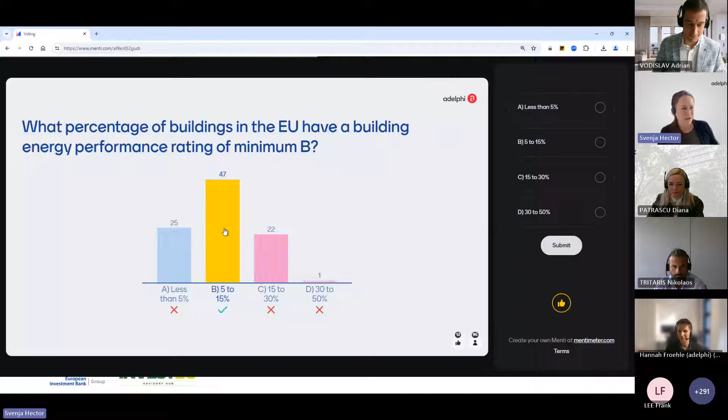Thanks for your answers. So indeed, the 47 colleagues here in the call that voted for option B are correct. If we look back at the slide set, we have this pie chart which shows that in the EU, about 10% of buildings have energy performance class B or better, with 75% being in the range of D or worse, and 16% in the C area.

The question is now, of course, what does that tell us? Is that good? Is that bad? Is that in line with where we want to get to, which is carbon neutrality including of the building stock by 2050? Indeed, this figure on the right-hand side says that we are lagging behind.

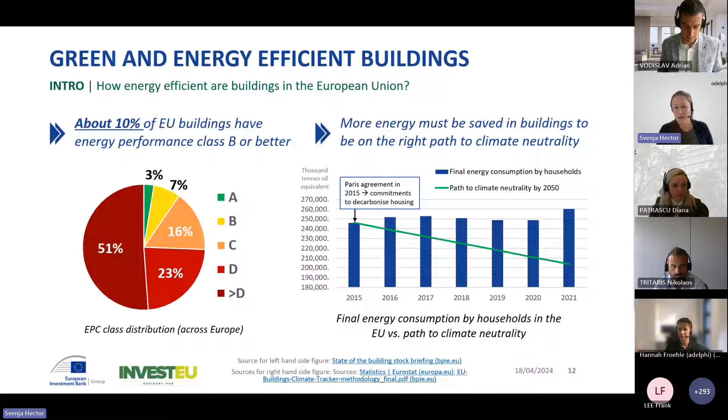What you see here is the final energy consumption by households in the European Union, shown by the pillars in blue, versus in green the path we should be following if drawing a straight line from the timing of the Paris Agreement in 2015 up until 2050. We should be following this path, but currently households are consuming too much. Hopefully the measures and regulations the European Commission has drawn out, in particular those shown here on the slide, will help us get more on track with emissions and energy consumption of buildings.

In particular, the ones highlighted here in yellow, but we'll say a few words on all of them listed here. Notably, several of those directives have been revised just recently. For example, the Renewable Energy Directive as well as the Energy Efficiency Directive have been revised in 2023, and prominently also the Energy Performance of Buildings Directive has been revised, with the revision adopted just a few weeks ago. Now let's look into what all of those directives mean for buildings and for the energy consumption of buildings.

The Renewable Energy Directive holds that by 2030, the renewable energy share of building energy consumption should be at 49%. The Energy Efficiency Directive, back in 2012, introduced national renovation targets. The Energy Performance of Buildings Directive, about which we will also hear more later on, is really the cornerstone of energy efficiency in buildings regulations within the European Union. It requires member states to define what major renovations are, what specific energy performance requirements are, what the renovation targets are, and to set up energy performance certification systems.

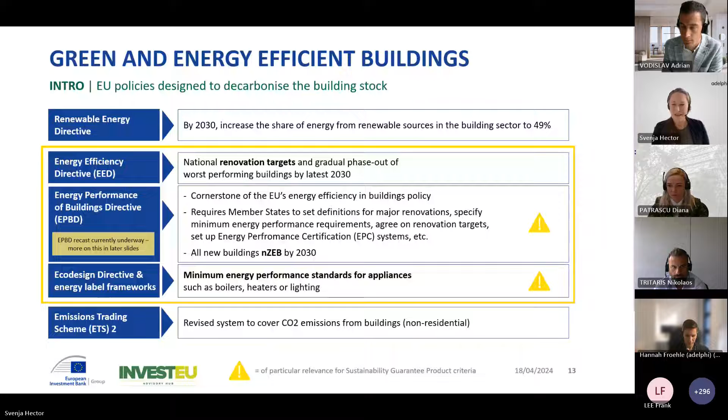Now, after this little introduction on the building sector, we would like to dive into the criteria for energy efficiency in buildings, both residential and commercial. For that, we would like to start again with a little quiz.

So please go back to your Menti, either on cell phone or in your browser. The link is still the same as previously. And there you will see the question popping up: which of the following measures are not eligible under the sustainability guarantee?

You can either apply your knowledge of the criteria here, or if you don't know the criteria in depth, just apply your best guess. You can vote among the following six measures: roof insulation and green roof.

Is it eligible or not? Mark it down if it is not eligible in your opinion. Construction of a near zero energy building, residential building of 6,000 square meters; purchase of an A+++ air conditioning; replacing old lighting with efficient LEDs; building performance consultation for the purpose of creating an energy performance certificate; complex renovation leading to 25% less primary energy demand.

So please take maybe 10-20 seconds to answer those questions, and we will then look at the results together.

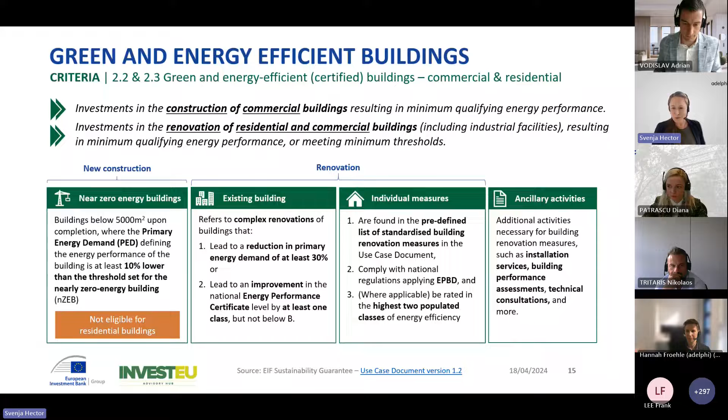With that, Hannah, I'll hand over to you to tell us a bit more about the first category, the new construction of near zero energy buildings.

Thank you, thank you Svenja. So as you just learned from the quiz and from what Svenja just said, under the sustainability guarantee, new construction is only eligible for commercial buildings.

For our purposes, these are any buildings that are not used for residencies. So that could be offices, warehouses, industrial buildings, agricultural buildings, etc.

The key criterion you need to understand for new construction is the nearly zero energy building standard, or NZEB standard. So what is an NZEB building? An NZEB building is highly efficient. It consumes very little energy, and the energy it does use comes mostly from renewable sources.

It achieves this efficiency through measures like highly effective insulation, high performing windows, energy efficient lighting, energy efficient heating, that kind of thing. So since 2021, all new buildings constructed within the EU already must be NZEBs according to the EPBD, the Energy Performance of Buildings Directive.

But the sustainability guarantee takes this further by requiring that newly constructed buildings have a primary energy demand that is 10% lower than the national NZEB standard for the country the building is in. Each member state has its own NZEB standard, usually based on a measure of kilowatt hours per square meter per year.

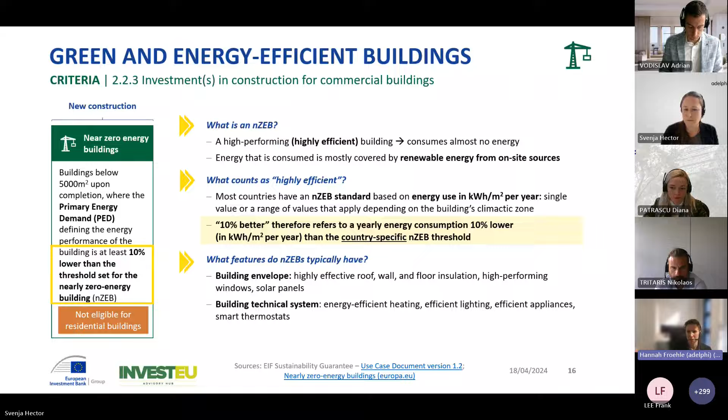Important to point out, these NZEB standards can vary widely across the EU, and we'll take a look at what that means on the next slide. As you can see from this diagram, there's a huge variation in the NZEB thresholds by member state, ranging from 30 kilowatt hours per square meter per year in Croatia to 290 in Malta.

As you can see from these orange boxes, some countries have a range of values that are applicable, and usually this is based on which region within the country the building is in.

As you probably noticed, there are several countries not pictured on this diagram, including Austria, the Flanders region in Belgium, Germany, Italy, Luxembourg, and Portugal. The reason you don't see them here is because they do not have a single or a set of kilowatt hour per square meter per year thresholds for their NZEB buildings.

Instead they have their own standard, and in several of these cases it's a composite metric that takes into account several different factors rather than just one. For example, it might require particular energy performances for different building elements rather than summarizing the building performance in this kilowatt hour metric like you see in the member states here.

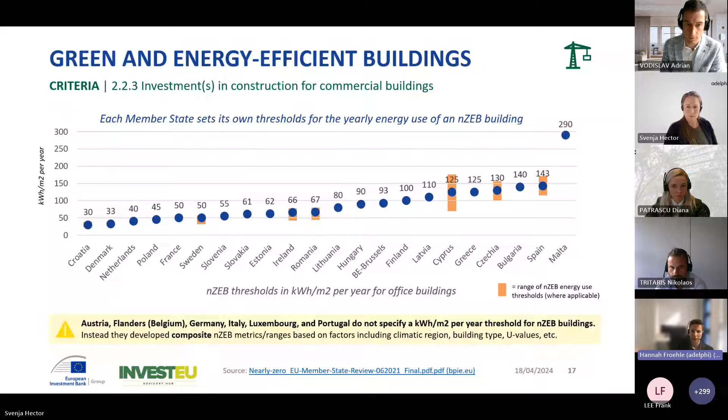On the next slide, we'll take a look at an example of an NZEB building of the type that could be eligible under the sustainability guarantee.

In 2014, a new office building for the HS Timber Group in Reci, Romania was built, and it has an energy performance that is far below the Romanian NZEB standard of 67 kilowatt hours per square meter per year, coming in at just over 16 kilowatt hours.

This is 75% below the Romanian NZEB standard, well over the 10% below threshold that would be required by the sustainability guarantee. And it is way below the approximation of a comparable conventionally built building, which would likely have an energy demand of almost 200 kilowatt hours per year.

Some of the features that make this building an NZEB include the fact that it has a geothermal heat pump, highly effective insulation, a combined heat and power system, as well as a building management system that controls and manages the building technical systems like the lighting and the heating, etc.

That's all for now on new construction and NZEB. Over to Svenja, who will talk about complex renovations.

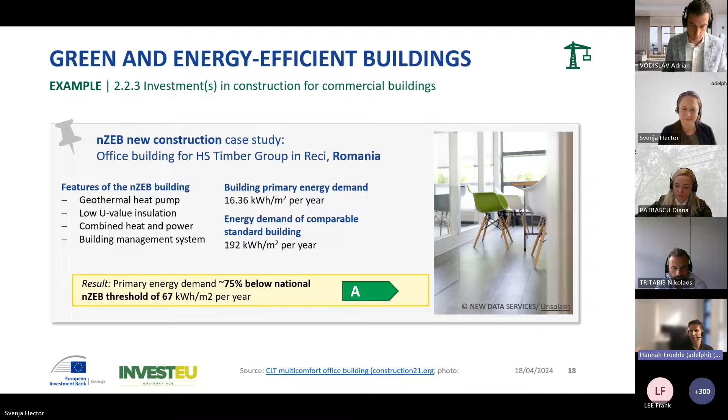Thanks, Hannah. Now we're moving to renovation. The building already exists, and what I'm going to talk about first is the complex renovation type, where the specific criteria are that the renovation needs to lead to a reduction in primary energy demand of at least 30%, or alternatively needs to lead to an improvement in the National Energy Performance Certificate level by at least one class, but not below class B.

I'd like to highlight here that there's no major renovation requirement, so it does not need to be a major renovation in the sense of the definition in the Energy Performance of Buildings Directive. It just needs to be a more complex type of renovation.

Now the question is, if we look at the second criterion here, requiring a certain energy performance achievement of the renovated building, what is this energy performance certificate or rating, and how can I document that on the side of the FI?

What we see here in the middle is an energy performance certificate example from Spain, I believe, where the middle column shows the energy performance of the building, classifying it as a C-rated building. On the right-hand side, you see the CO2 emissions per square meter of this building.

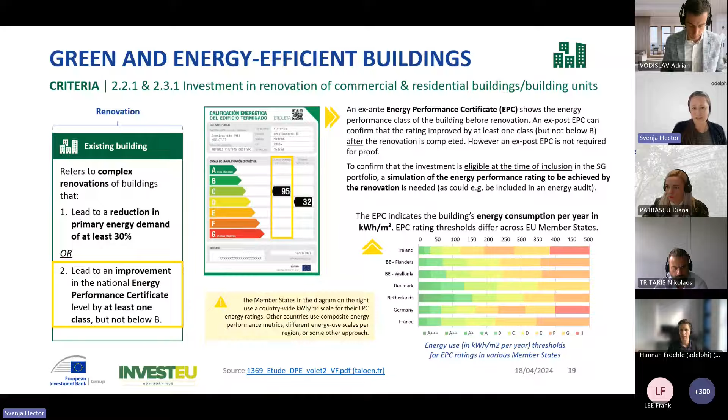Let's look at an example. Here we have a complex renovation case study in Barcelona, Spain, conducted in 2022. The building was constructed in 1900 and has a net floor area of 167 square meters. We have quite a number of different measures, qualifying it as a rather complex and comprehensive renovation.

Several measures were conducted on the building envelope: insulation, window replacement, sun protection. Then renewable energy was installed—a heat pump, two PV installations—as well as a smart control system to optimize heating and cooling depending on PV production, plus additional measures such as a shower waste heat recovery system and low carbon materials used in the renovation.

The overall investment costs of this project were roughly 170,000 euros, amounting to about 1,000 euros per square meter. The forecast energy bill after renovation is 630 euros per year—pretty low. What does that mean in terms of energy consumption? What does this renovation imply?

The energy demand before the building renovation was 102 kilowatt hours per square meter per year. If we only account for the energy efficiency measures, without the renewable energy production, the demand would be 64 kilowatt hours per square meter per year after renovation, or even down to 4 kilowatt hours per square meter per year when accounting for the building now consuming way less energy from the grid.

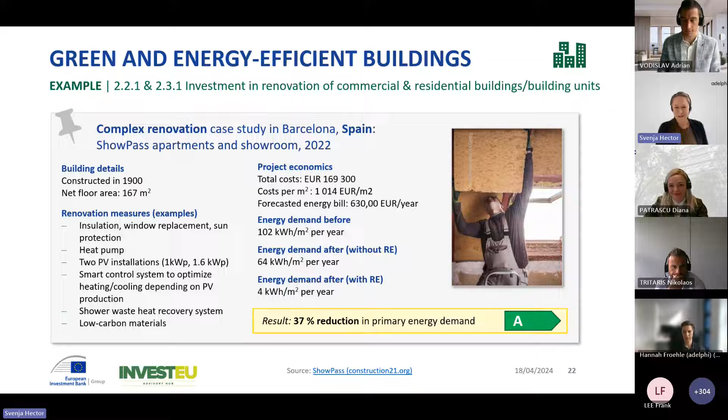Overall, this building achieved a 37% reduction in primary energy demand, resulting in an A rating after the renovation. So this building would be eligible based on the requirement that a minimum 30% energy savings need to be achieved. By the way, this is a showcase building, open for public visit—so if you're living in or visiting Barcelona, you can go check it out.

Let's take a look at the other renovation category: individual measures. These are measures listed in the use case document in a predefined list—all very standard, typical energy efficiency measures. Let's look at this building to understand what they are, with the descriptions around it.

Typical measures for energy efficiency in buildings are measures on the building shell—we heard a couple already—including insulation of the roof, external walls, basements, etc.

Windows and door replacements would be measures on the envelope, and then also measures such as facade and roofing elements with solar shading functionalities, as well as green roofs and walls with insulation properties.

The technical system of the building can also be improved, both electrical and thermal. Light sources play an important role in the system. Boilers and stoves and their replacement would be eligible. Heating, ventilation, and air conditioning equipment could also be eligible measures. Measures such as building automation and control systems, and thermostat systems could be eligible as well.

As you see here in those white boxes, for many of those individual measures, certain thresholds need to be complied with. For example, in relation to insulation and window and door replacement, certain minimum or maximum thresholds concerning the U values of the system, the insulation material, or the windows need to be observed. The U value basically means the thermal transmittance of the material.

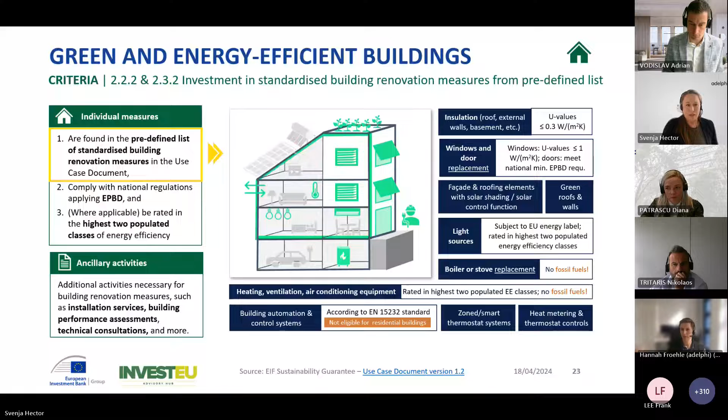Lastly, let's look at this second requirement, the required compliance with national regulations applying the Energy Performance of Buildings Directive. The Energy Performance of Buildings Directive does set minimum building energy performance standards for individual building elements, but it does not say what exactly those thresholds are and how they should be implemented. This is defined by member states, by each of your countries.

That also means those minimum thresholds are not harmonized, which also means we cannot make a general statement about what those minimum thresholds are. So to ensure this second point, you would need to check that in your locality, either through internal technical experts, or of course you could also involve an external technical expert.

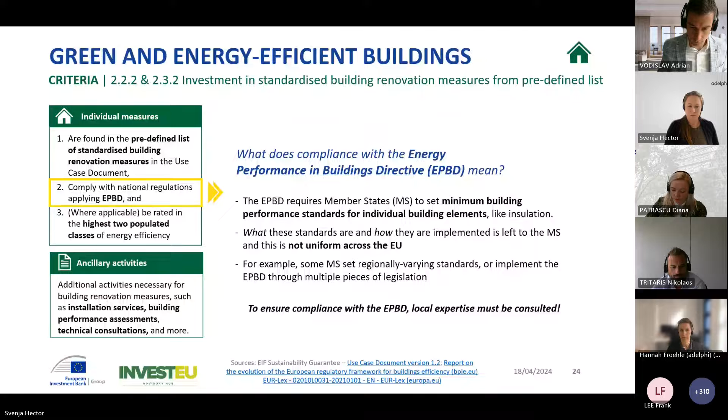Hannah, handing back over to you for some information on how we document measures in the area of energy efficiency in buildings. Yeah, thanks.

Let's talk about documents. For all types of investments under the sustainability guarantee, you need to collect documentation as proof that confirms the eligibility of the measure. There are two parts to this documentation requirement. First, you need technical documentation that shows the measure meets the required criteria, for example the U values that Svenja was talking about. Second, documentation that shows how the funds are going to be used.

For the second, funds documentation, it could be something like an invoice, a purchase contract, a quote, a price quote, things like that. But let's take a closer look at this first category of documentation.

What can be used here? Depending on the type of investment, one of those listed on the slide could be collected as the technical documentation: either a PDF report from the Sustainability Guarantee tool, which you might be familiar with, some other kind of technical documentation showing the parameters for the measure have been or will be met, a description of the investment, or in the specific case of ancillary services, like the creation of an EPC, documentation showing the services that are going to be provided.

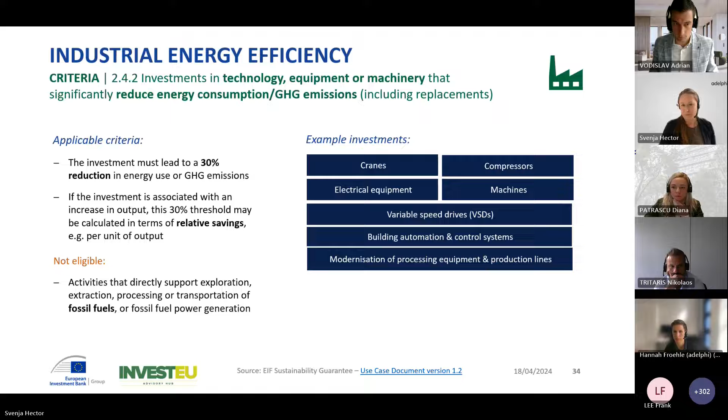Let's take a look at an example. This one here is an example of a brick manufacturer based in Austria called Wienerberger Group, a very big brick and block producer. What they have done is replace or improve the process to dry the blocks.

They have gotten rid of the previous natural gas-based drying process and replaced that natural gas burner with a high temperature heat pump, an industrial large scale type of heat pump. This heat pump uses waste heat to provide air into a tunnel in which the bricks are dried, and therefore the humidity, the moisture in the bricks is reduced.

This heat pump has a capacity of 400 kilowatt. Notably, it's also using a refrigerant which has a very low global warming potential, further adding to the sustainability of the measure. As mentioned, the heat source is waste heat, and the supply temperature from the heat pump is between 110 and 160 degrees Celsius, which seems to be what is needed for drying those bricks.

The target results of this measure, based on a project outline and technical design study, are 84% energy savings and 80% CO2 emission savings. Quite an impressive result from this measure. By the way, this measure is part of a European project, H2020 project called DryFiciency, if you want to check it out.

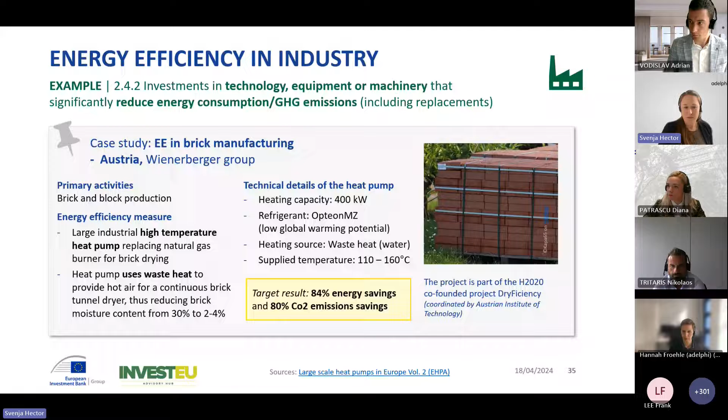Let's take a look at agriculture. Under the heading Industrial Energy Efficiency in the use case document, the category Energy Efficiency in Agriculture is also covered. Here we have the key criterion that energy efficiency measures in agriculture must lead to a 30% reduction in energy consumption or a 30% reduction in greenhouse gas emissions.

Example investments include the modernization of processing equipment, such as food processing equipment for processing the harvest from the fields. Also, self-propelled or traction agricultural machinery, such as tractors and combine harvesters. Third, the modernization of irrigation networks or irrigation systems that lead to energy savings, where we need to take into account that new irrigation or expansion of existing irrigation systems would generally not be eligible, but could be eligible if certain rules around surface water and groundwater are observed.

We have here an example from a farmer in Poland, Marcin Grin, who is a vegetable producer and who has invented, with his family I believe, a machine that does three things at the same time, thereby replacing three machines he would have used previously. This single machine does at the same time the cultivation, sowing, and fertilization of the field, meaning he only needs to go over the field once instead of three times, which also induces energy savings.

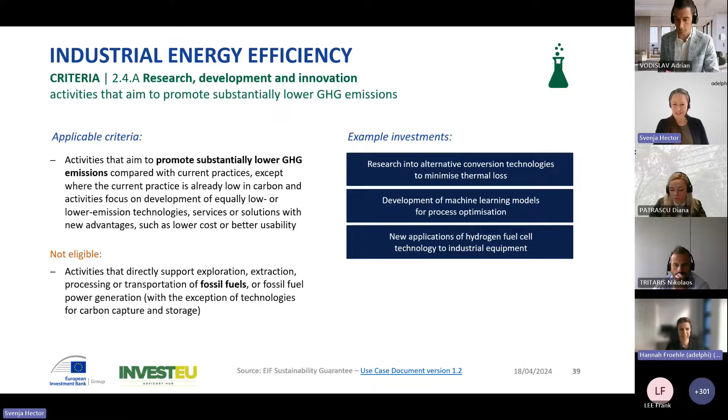As with buildings, for investments in energy efficiency in industry you again need these two main categories of documentation, both to be collected before disbursement of the loan: one that shows the technical parameters or thresholds for the measure have been met, and one to prove the use of the loan funds. For industry, the purpose of the technical documentation varies slightly based on which investment subcategory we're talking about.

So if we're talking about the replacement of machinery, technology, or equipment, including in agriculture, the technical documentation must show the estimates of the energy savings that this investment is intending to achieve. So very similar to what we saw under energy efficiency in buildings.

Now, on the other hand, for EE and industry related to research, development, and innovation activities, the documentation must show how these research activities will eventually lead to lower greenhouse gas emissions or better efficiency once these activities are complete.

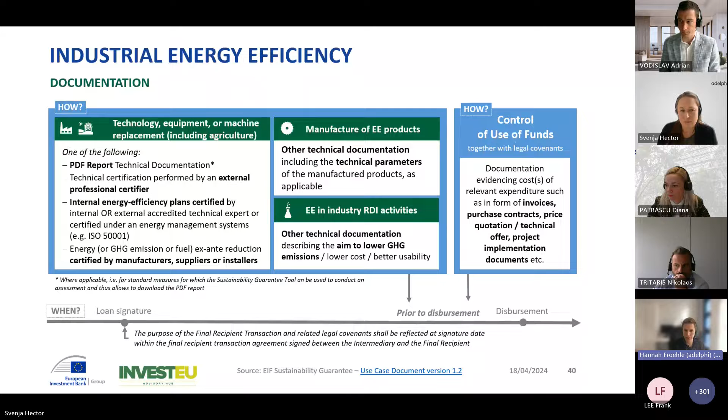So from here, we will move from discussing EE in industry, which is section 2.4 under the sustainability guarantee, to a distinct but related investment type that is also eligible under the sustainability guarantee: green data centers, which is under section 2.6. 2.6 is green ICT for climate change mitigation, which broadly speaking has the objective to develop or adopt green information and communications technologies, digital solutions that lead to a decrease in energy consumption, pollutant emissions, or contribute to climate change mitigation objectives in other ways.

And green data centers are just one of several subcategories of investments under green ICT, but the others we'll talk about in our next webinar. So please tune into that one as well if you weren't already planning on doing so.

So focusing now on green data centers, a green data center is one that conforms to recognized standards and best practices in energy efficiency and environmental impact. And the use case document includes several examples of EU and international based standards that the data center must conform to in order to be eligible under the sustainability guarantee.

So what does a sustainable data center look like? We'll take a look at a case study on the next slide. But before we get into the specifics of that, I just want to make sure we're all clear about what a data center actually is and why we're actually taking so much time to talk about them in particular.

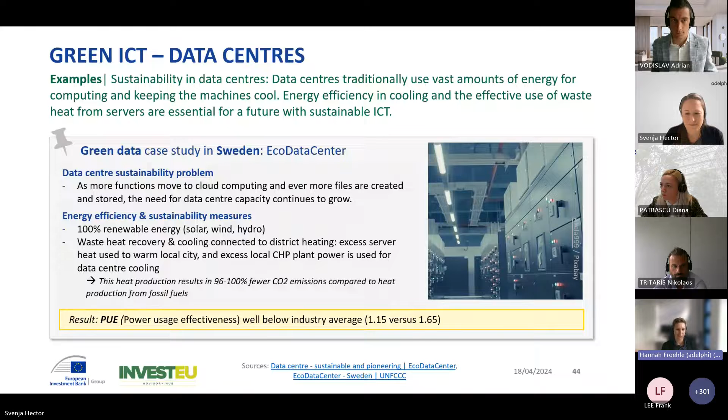Diana, first question is in regards to agriculture and machinery. Most of it still relies on fossil fuel. There's not a lot of electric machinery or equipment out there. So would it be eligible if there's fossil fuels involved?

Yes, thank you, Adrian. There is a need, so there is the 30% minimum need for the greenhouse gas emission reduction. However, under the generic use case document, there are no restrictions with regards to the type of fuel up until 2025. So this is currently the situation.

Okay, and still about machinery, we talk a lot about 30% reduction in greenhouse gas emissions. What exactly is that?

You mean with regards to the 30% relative reduction? Relative reduction, exactly. Well, when it comes to relative reduction, this was used acknowledging that, for example, in some cases, companies may use the investment to upgrade or modernize the production lines or processing equipment. So basically, their output will be much bigger. In this case, the calculation of the 30% can be done relatively, meaning per unit of output. So if you're producing more, then you would look at what is the consumption per each of these items relative to what it was before.